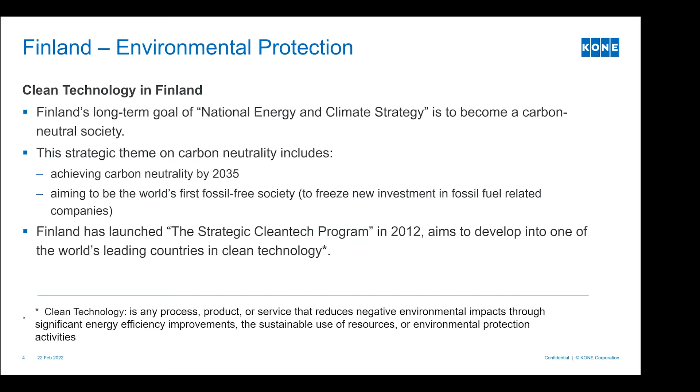In KONE, our culture is also a derivative of the Finnish culture. Today about 50% or slightly less of people live in urbanized areas, which makes about 3.5 billion people. But by 2050, this number of urbanized citizens will grow from less than 50% to over 70%, meaning that most people around the world in about 30 years' time will be living in urbanized areas, in a city with fewer trees around us.

So urbanization is a trend, and we see that to maintain the growth and well-being of people living on this earth, sustainability is something we have to look into, not in the future, but now. By using technologies that we design, that we build, that we deploy, to make the world a better place, a more sustainable place, a place with more urbanized living space. This is the ambition and our culture in KONE.

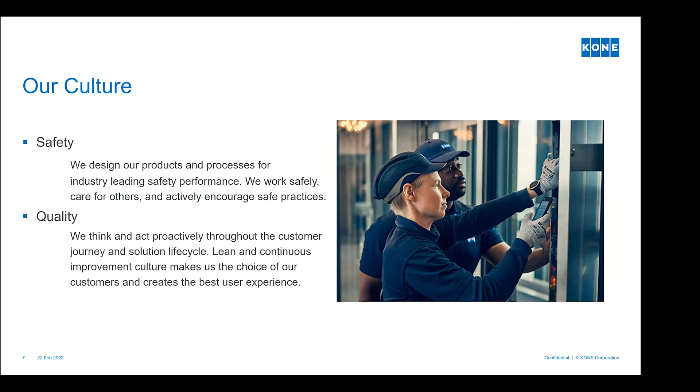Now, for this particular presentation, we focus more on sustainability. What we are looking at is we commit to full carbon neutrality by 2030, probably the first in the world for all companies, at least in our industry. And we have sustainable solutions. This is all culture-wise, so everyone is trying to do that. In the next few slides, I will show you the actions we take.

So before we go into that, our ambition. Our mission is by 2030 to be carbon neutral, which means a significant reduction in greenhouse gas, total emissions. It's the most ambitious target in the industry by all means. We started this action not this year, but 7 years ago in 2015, when we signed the Paris Pledge for Action. So this is a very long-term goal.

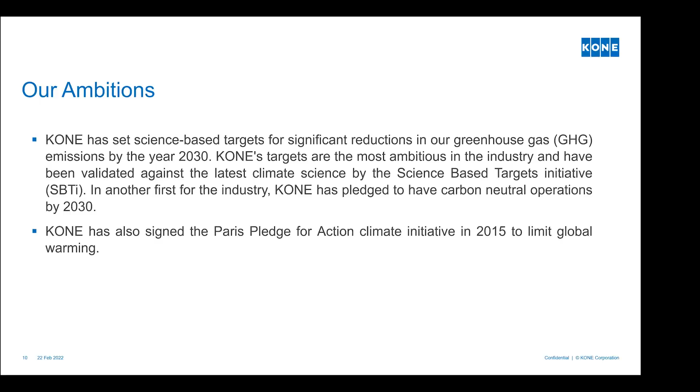Now our actions, focusing on the actions here in Hong Kong. We are looking into the reduction of scope 1, 2, and 3 emissions - direct, indirect, and other emissions.

We are the first lift company to deploy electrically driven motorcycles as a replacement for fossil fuel motorcycles. Unfortunately, a motorcycle is a must for our frontline technicians, because we need to arrive on site at the scene if someone is trapped inside the elevator. We need to be there in the shortest period of time, and driving a car or taking the metro is not the best solution we have. So motorcycle is probably one of the better solutions.

We have over 100 motorcycles deployed in our depots around Hong Kong. Currently they consume more than 50% of all our fossil fuel scope 1 emissions basically. So we started to look into the replacement for these motorcycles last year using electrical vehicles.

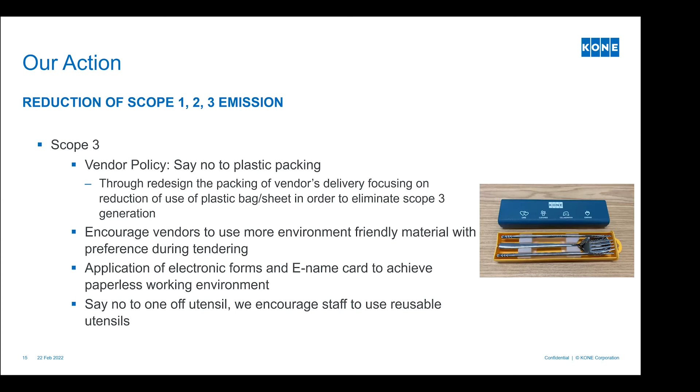We are also trying to collaborate with partners and vendors on carbon reduction. There's a carbon reduction commitment that we encourage our partners to undertake, and ourselves as well. We are prohibiting the use of polystyrene, so all our packaging uses minimal plastic, and we're reducing plastic sheet wrapping. Again, instead of 2 or 3 times, we use wooden crates and then one single protection cover, that's it. We also encourage our vendors to do the same. This is again bonus points for vendors who are doing well on environmentally friendly packing.

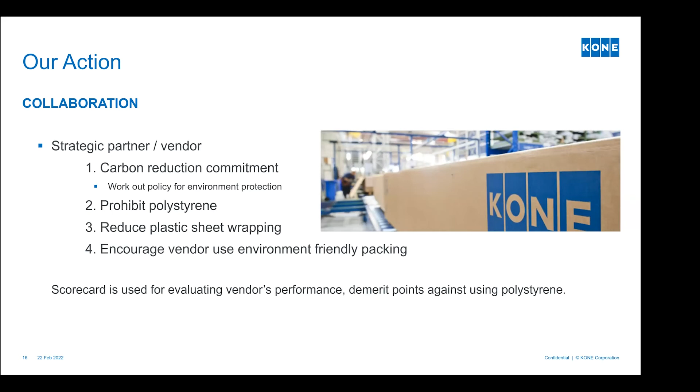Also in our processes for construction, we use a lot of bamboo, especially in Hong Kong, for the construction industry. All these bamboo scaffoldings can actually be reused, but many of them will be thrown away, and there's a lot of bamboo in landfills. It's about 10,000 members per lift shaft installation, so it's a lot of bamboo members.

What we are trying to do is reduce the use of bamboo members, and instead use a technology that we deploy to help sustainability: a scaffoldless installation. We have a system where we can install the machine self-hoisting, so the machine raises floor by floor while installing the rail. This is a design we first deployed some 10 years ago, and now we are encouraging our customers to adopt this solution. Some of the leading developers have already taken the lead with this installation method, proving to be very successful and again saving the environment.

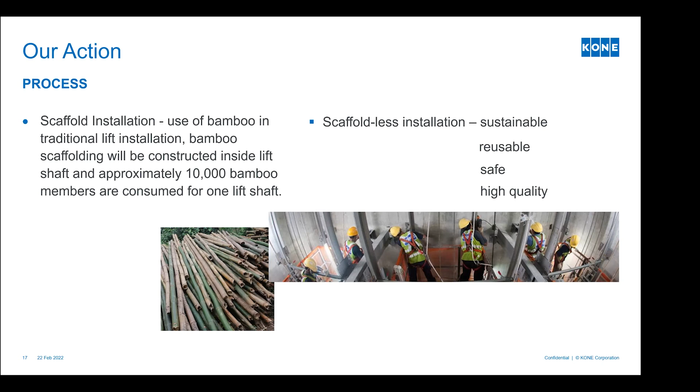Especially for end users in some high-rise buildings, if you are walking down, we encourage them to walk down 2 flights and walk up 1 flight. This is something we have done in the past 2 to 3 years.

Okay, so that's the how, and I will talk about the what. So our innovation, our technology. We have the action, and then we have the technology to support.

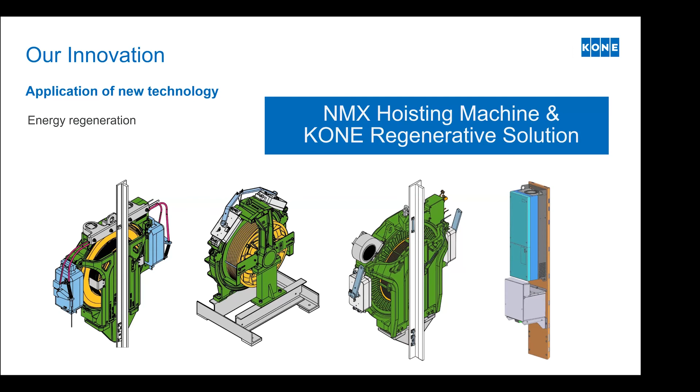Now we have this type of motor we call the energy regeneration hoisting machine. This is a disc machine. The normal motor is a tube, it's like a battery. It's a tube, but our motor is a disc, and this has much better energy efficiency. I'll talk about that in a minute.

So the design is novel, has been around for about 20 years, deployed around the world. It's not only energy efficient, but it's also saving space.

Our installation can reduce the need for a machine room. Normally there's a machine room on the roof for elevators, but with this disc-like machine, we don't need a machine room. We only need maybe 1.5 meters above the top floor. So that saves construction as well, and construction means saving energy, material, landfill and so on. So there's a lot of benefits.

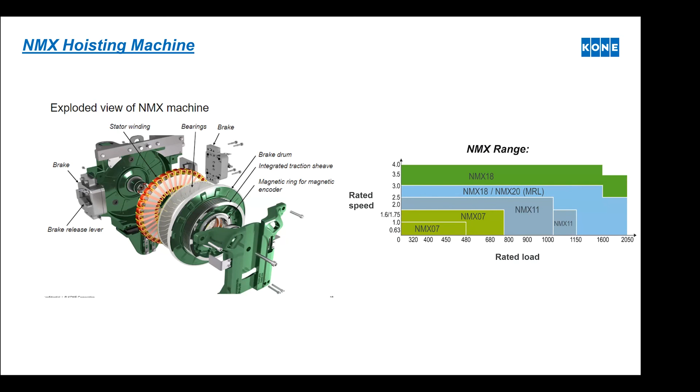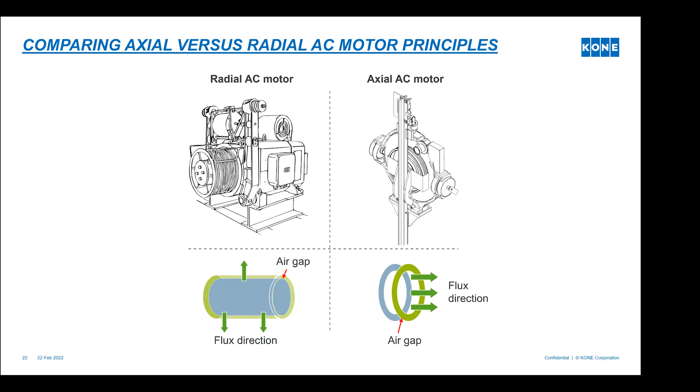So this is a comparison with the so-called radial AC motor, which is the traditional motor. Because of the air gap and the flux, it's a bit technical, but the motor efficiency is slightly less than the axial AC motor, which is our disc motor. With the energy efficiency being improved, energy is saved.

Also, we have what we call regenerative braking. So the top picture shows normal elevator energy consumption - regardless of direction of travel, if you go up or down, the motor is in motion, so energy is consumed. But for our regenerative braking system, if you have a heavy load of people going downward, energy can be generated from the motor, from our system, back for lighting and ventilation for the AC.

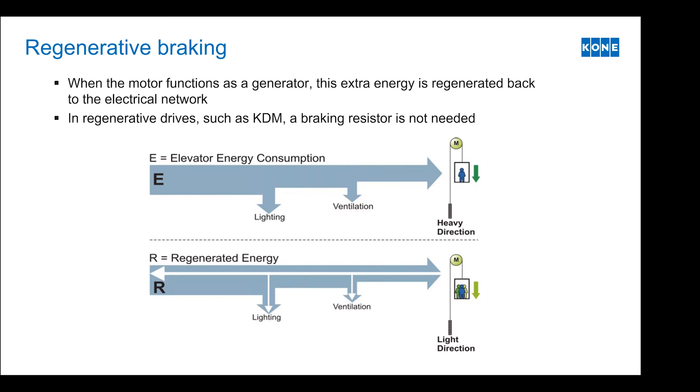It's just like a solar panel installed around Hong Kong that saves energy or feeds it back to the grid, so-called. So this is the energy consumption, which I'm not going to detail, but this may be the picture everyone wants to see - the energy consumed is saved by up to 35% with our system.

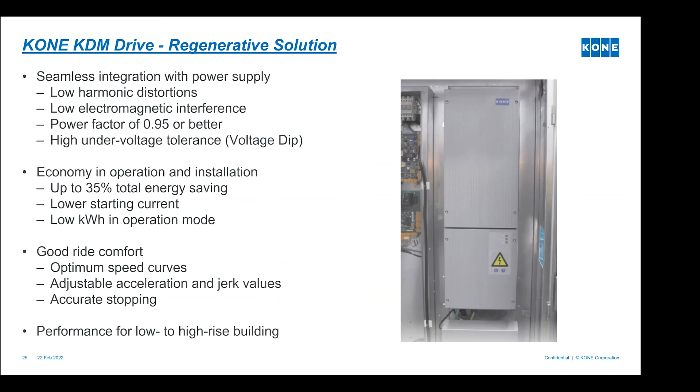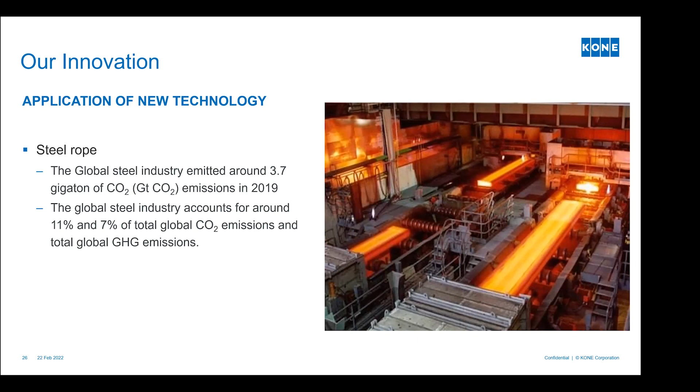Also, the use of steel in lifts and escalators is significant, especially the steel rope. And the steel industry is one of the prime sources of GHG and CO2 gas emission problems. So we have this innovation: we use a carbon fiber type of rope to replace the steel rope, and the weight is only 1/5.

Imagine that if you have a 100-meter tall building, that saves a lot of dead weight, which is the rope itself hoisting up and down.

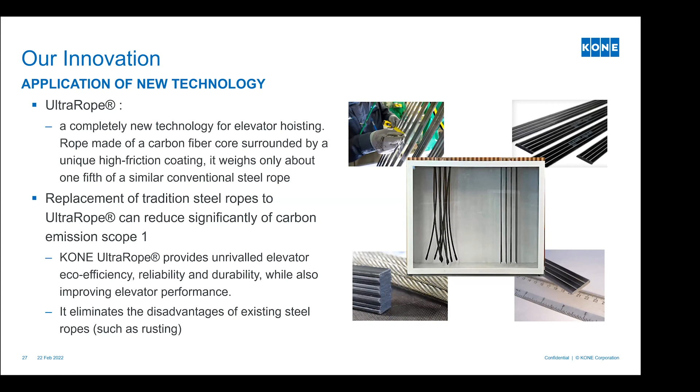So our ultimate goal is to have carbon neutrality. Starting from April 2021 last year, we have listed out the carbon cost and also the operational results. My bonus is based on this carbon neutrality. From this year onward, we will also be reporting in our income statement the carbon costs. So we are encouraging all our staff to reduce carbon emissions.

So in January 2021, we commenced what we call the Sustainable Success with Customers strategy, which is to win with the customer, to save energy, to be sustainable with the customer. We focus on this from now until, I don't know, maybe 2030 as our first milestone. So we want to ensure that all our operations and all our customers' operations are sustainable and with zero carbon emission. Thank you very much.